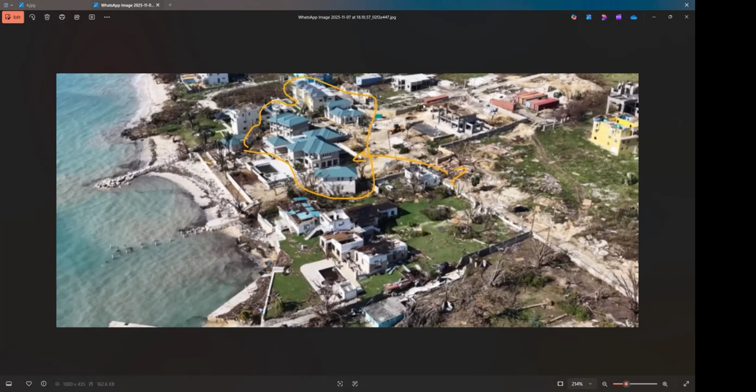But interestingly, there was this one, one of those drone pictures that they were taking down at White House. This is in Westmoreland. And if you notice here, this seems to be a new development, under construction. In a sea of no roofs, anything that is not a slab, gone. But yet still, all the roofs in this development are intact. It's the same roofing technology. It looked like standing seam roof, I think. But I don't know if they were just lucky or it's some kind of interesting construction there.

This is actually a screenshot from a video. I was watching the video, and I'm like, hold on, this place right by the seaside completely has all the roofs. So I thought that was very interesting. It would be nice to investigate how they did their roofing technology. Anyway, that's enough about the storm. It is already dominating our lives and the news airwaves. But I thought I would share my experience with the whole thing.

Anyway, so I guess most of you got my message, right? Switching gears back over to our module now. Who here has finished checkpoint 3? Give me a thumbs up if you have. All right, at least 90%? Give me a thumbs up if you have. All right, cool. Couple. 70%? Who here is at 70% completion? Give me a thumbs up. All right, cool. So the majority of persons here seem to be pretty much there.

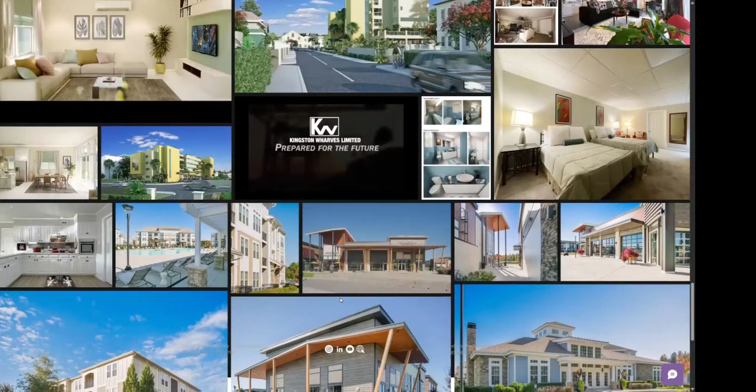Kingston Wharves has been connecting communities and markets for almost 70 years.

Here's what we're going to do. Let's not use the website because it's playing all those videos at once, which is kind of crazy. I probably need to look into that setting. I'm looking for the video directly because I have them somewhere in my computer. 1 second. Okay. Here we go. All right, found it. All right, here we go.

All right, so this was primarily for marketing that we did some years ago. We did some graphics. Right. So this was in Manor Park. Probably finished construction by now. So we did a little map graphics. We did that in After Effects, I believe.

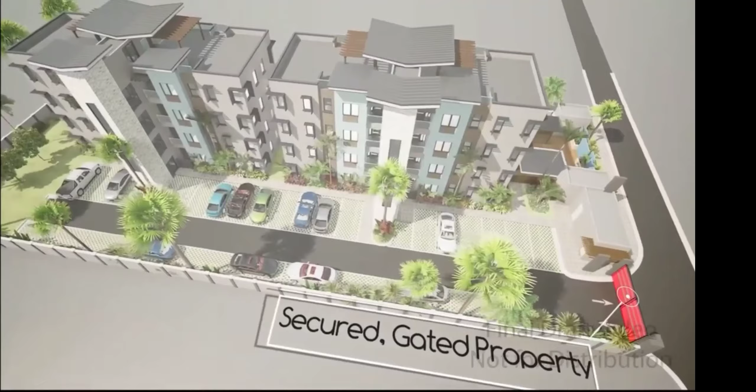And then we went up and did some drone images. We kind of transition in between the drone images and the rendering. So we did this in Unreal Engine, and we did the model in Revit. Most of those graphics that you see, well, this part is in Unreal, right? And how we did it, we did multiple versions and then overlay them together in Premiere Pro. Most of the text stuff is in Premiere Pro as well, all of the text information.

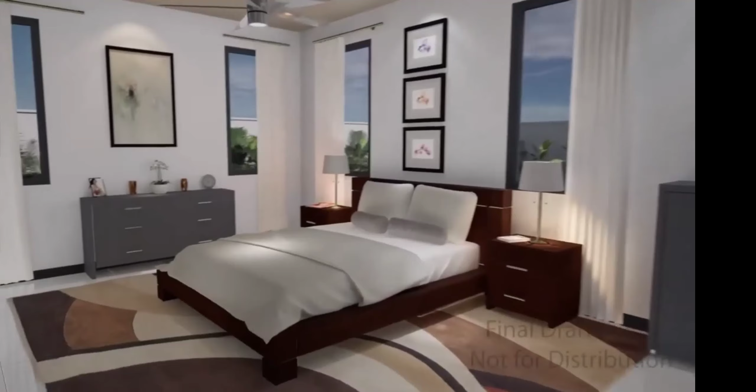There we go. So this was inside. These are not Revit furniture. We replaced them with custom furniture. It still has that draft video thing there. I remember we had fun putting flames under that kettle. That was kind of a journey to do that. All right. I think, oh, one more. All right, and then there was the bathroom as well. All right, cool. So that was pretty cool, and that was fun to work on.

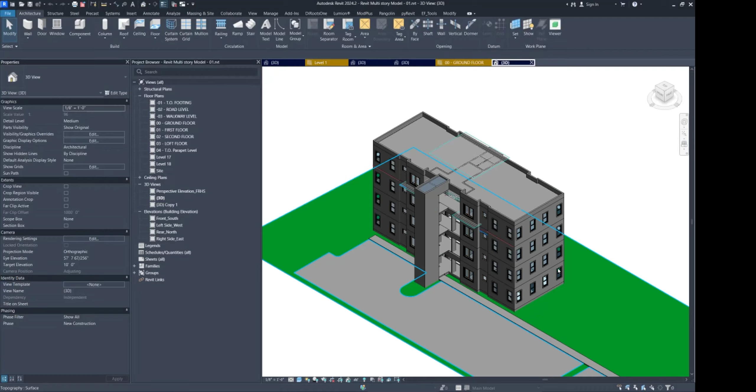I grabbed a version of that file that we worked on. This is the Revit model. I believe the original model was Revit. I don't remember. It was years ago. But the reason I wanted to show you that is I want to give you what the end product looks like, and then a little bit of some of the processes that we use. And this can definitely directly apply to you guys because you guys are doing a multifamily project. And there are some techniques that we employ here that you guys can use.

One of them is going to be groups, right? Anybody here ever used groups in Revit? Anybody familiar with groups? Give me a thumbs up if you are. Nope. Nobody? One person? Cool. All right. So once you have something that repeats, I would argue more than 2 times, then you should probably turn it into a group in Revit. So right away you can see that these apartments here, they repeat.

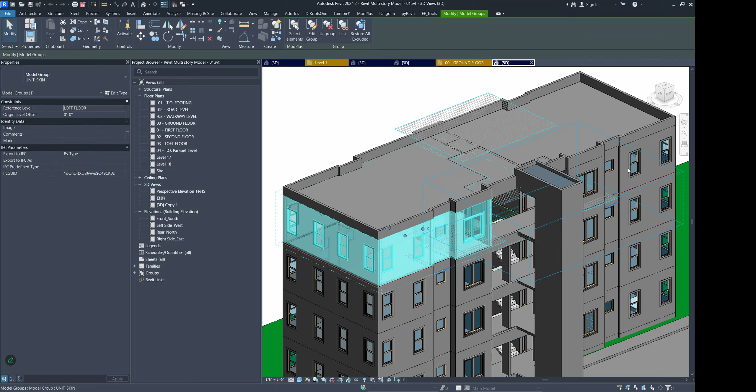We can also see that the stair tower does not repeat. It's just one thing, but the stairs inside repeat a couple times. So when I click on this, you can see that this unit here has repeated over here. And the great thing about this is that if I go into the group and I decide to remove this window here, choose OK. Then what you notice, all of the windows in the other groups are also removed as well.

Give me, oh, only 1 second. Sir, your mic is off.

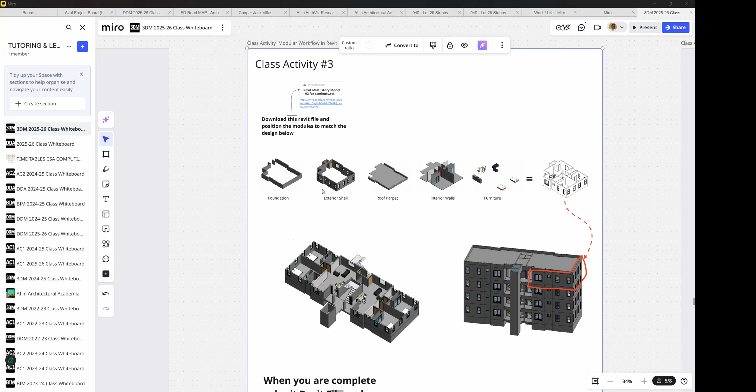It's mute. Sorry. Right. On the Miro board, there's a class activity that I want us to tackle today. And what it is, a version of this building, and it's broken down into different components. Now, the reason we're doing this is that this is a method that I would want you guys to be using when you're doing your multifamily project. It doesn't matter if it's a townhouse or apartment. Once you have something that repeats, you're going to want to put it in a group, right?

So I want you guys to head over to the Miro board. When you go over to the Miro board, just look under the section that says class activities, and head over there. And there's a link right here to the actual Revit file. It is a Revit 2024 file, so it should open in your Revit. And I want you guys to follow along. I want you to go access the file and open it up. When you open it up, it should look something like

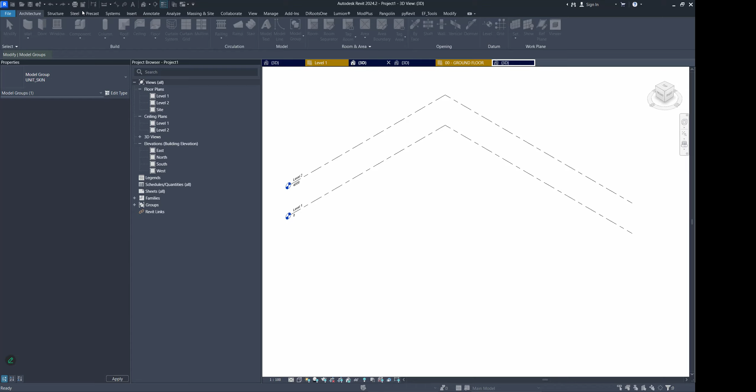there we go. All right, it should look something like this, where you will see the parapet, the furniture, the interior and exterior walls, and the foundation walls. All right, so I'll give you guys a couple of minutes, so just jump on the Miro board and use this. And what we're going to do, because you guys are actively working on your units now, so this applies directly to what you're doing in studio, right? Have you guys started to work on your overall building or just the units?

We haven't started anything yet. Say again, Mario? You haven't started anything yet? No, sir. We're working on programming right now. Ah, you're working on programming. All right. Do you have a question? Sir, it's not a question, but I was just telling you that I don't have Wi-Fi to open the files. Oh yeah, that's all right. So the students who don't have internet as yet can watch the recording and do that? Exactly. We have the flexibility, so you can hand it in when you get a chance. All right, just confirming. Thank you.

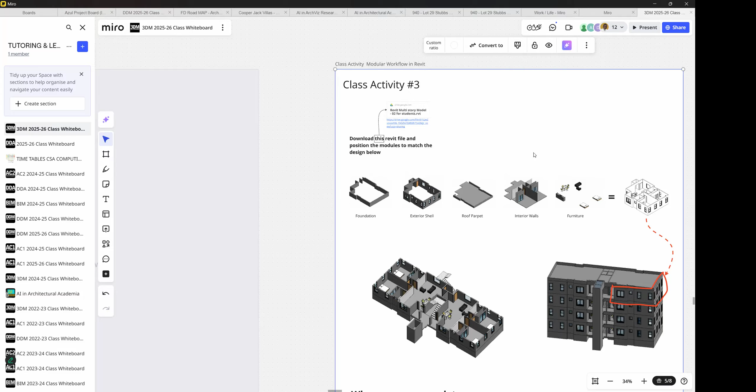As soon as you have your unit done, what I want to show you is a method of how you can set up your Revit file, because you have to put all the units together in order to generate your elevations, perhaps your sections. So I want to give you some tips on how you can do that. So let me just continue along our path. Go ahead and get this model file from Revit, and it should look something like this.

One thing I should definitely not be seeing is, if you have 10 units, you're repeating the same thing 10 times. No. You need to be using groups to supercharge your workflow, because working in Revit is supposed to make you go much quicker. For your design studio, you probably need to be showing a floor plan, your elevations, your sections, probably some sort of 3D view. All of those things we're going to be doing in computing so that you know how to do it for your design studio project.

So, okay. All right, guys. Have you opened the model? Anybody can confirm it? It's opening. Okay, cool. Give it some more time. All right.

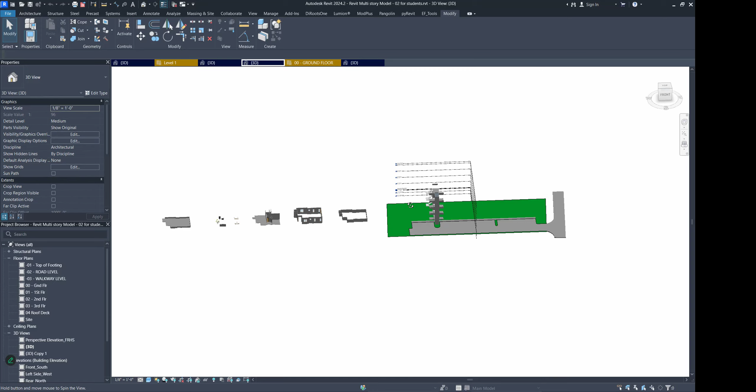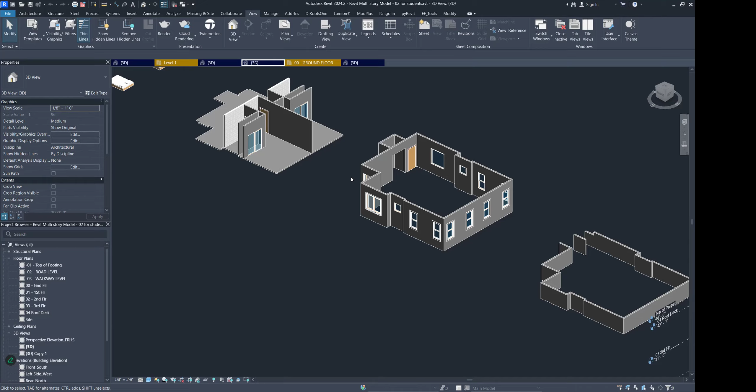By the way, if you are like me, I'm a fan of dark mode because I can be a night owl at times. If you're using Revit 2024, you can go to View and change your canvas theme to dark mode, and that will save your eyes. Somebody recently said they didn't know Revit does this, and I'm like, yeah, it's right there. As a matter of fact, CA is a shortcut. If I go CA, it changes back. CA again, it changes. Usually I work in dark mode while I'm figuring things out and modeling, and when I'm ready to lay out the sheets, I switch to white mode. But that was just a side note.

All right, so when you open up this file, you will see this is the parapet. So this is going to go on the roof.

And then you will see the furniture. Now, the unit we have is pretty straightforward. When you are designing your unit, so let me give you this version here. So this is a unit that is not fully designed yet, but this is what your model will probably look like for your design studio, right?

When you're working on it, you will probably be in a plan view like that, and you will probably be laying out your furniture according to your design and all that stuff, right? Now, as soon as you're done laying out your design, what I suggest is that you start a new file, a new project, and then this project is your production project. So in your production project, meaning this is what you're going to generate your floor plans, elevations, and whatever for.

So in this production project, you're gonna model your unit just like how you would normally do, putting in doors, windows, and everything. Then what you're going to do is separate out the major components of your building. So in this case, I have separated it into furniture, interior walls and floor, exterior walls. These are my foundation walls, and then this here is my parapet wall. So this is basically the roof, right?

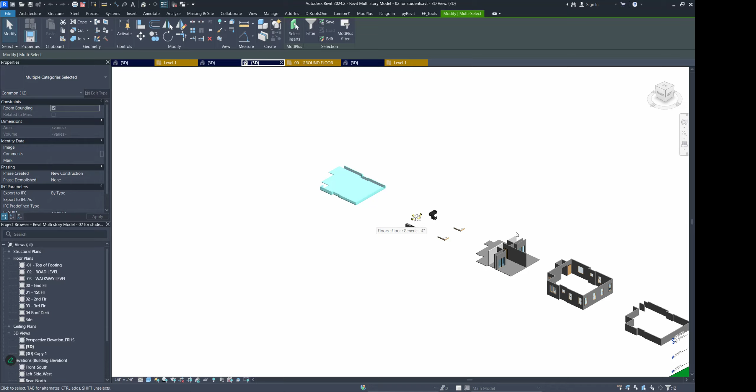Now, when you separate them out like this, you're able to group them. So the first thing I'll do, I will select this here, and I'm gonna go over to Modify, and then right here is where you will see Group, right? So I'm gonna click Group there, and you guys can follow along as well. When you click that, you're gonna get a dialog box that comes up, and I'm gonna call this roof. I'm gonna choose OK. I have a thing there, roof again. Let's call it roof 2.

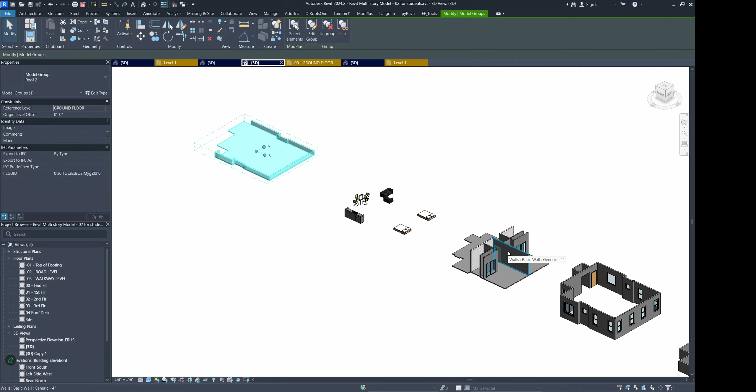Now, one thing to note is that I have separated this out to show you. If you had the model together, it would be kind of hard to select the different parts of the model. So this is why I chose to separate them out. So if you're kind of new to Revit, I would probably do the same thing. This is when you're finished with the unit design. I would separate them out, and then I will create groups and then put the groups together, right?

Because when the entire model is together, it's going to be much harder for you to click this, then click that, then click the top of this, then click the sink, click the stove, to click all these individual things and then group it, and then maybe you miss something. So when you separate them out, you can clearly see where you're putting your group. Remember, this is after you finish your unit design. You want to make sure that it's done, out of the way, and you're just trying to stack them together now, right?

Now, the good thing about groups is that you can edit your unit design even when you finish stacking them together. Because let's say that you realize, oh crap, I want to add a new closet or whatever. You can always change the one group, and then all of them will change, which is pretty cool. All right, so I grouped the roof.

I'm gonna group this. Oops, not that. I'm gonna choose Group. I'm gonna group this as furniture. I'm gonna put a close bracket there. The reason I'm doing this is because I have some other groups in this project. I don't want it to get confused. I'm gonna put this in a square bracket. Right, you can't use square brackets. Oh well. Can I use underscore? Yes, good. All right, good.

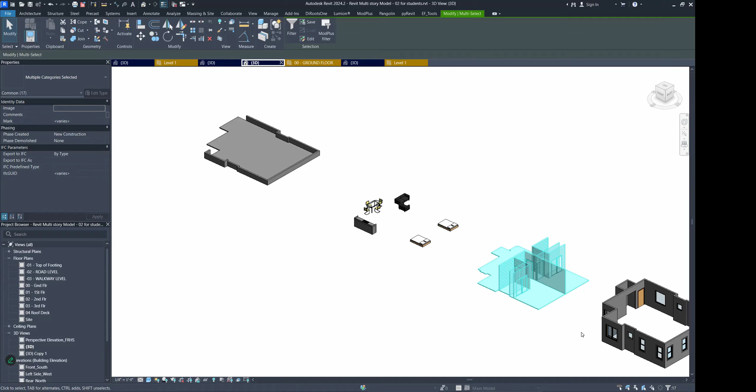So I'm going to select this one here now, and I'm going to group that underscore interior walls. And I'm going to select this guy here. Why do I keep pressing that button? I didn't mean to press that. I meant to press Group. And I'm going to go underscore exterior walls. Select this guy here.

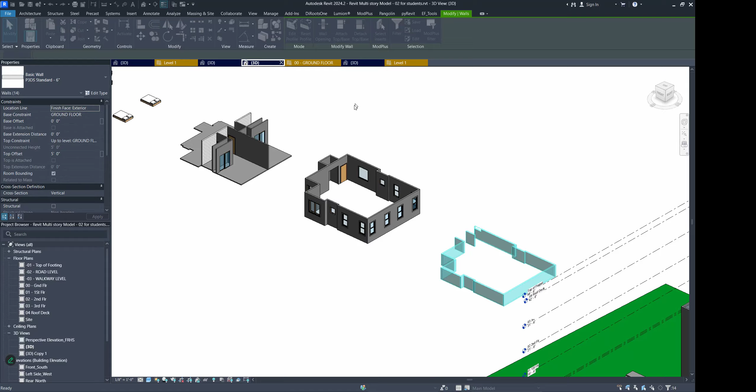And I'm going to group this one as underscore foundation walls. All right, now once I do that, let me just take my project browser and put it up here so that you guys can see it clearly. All right, I'll drop this over here. Okay, you don't want to go over there, that's fine.

Anyway, the reason I'm showing you this is if I scroll all the way down in my project browser, you see you have families and groups. If I expand this, expand model, you will see where I have those groups. Now I have some other groups in here, but these are the groups that I created: exterior walls, foundation, interior walls, and so forth, right?

Now if you're using this project, you're going to be seeing these other groups too. So I can't mass delete them. Can I delete that? No, I only can delete them one at a time. Anyway, just ignore them for now. These are the groups that I created up here. Now, here's the awesome thing with groups. Come on. All right. This is where you go to control the groups that you have created, right?

So for example, if I wanted to rename this group, I could just go to here and right click and rename. I can also rename it in edit type as well. So for example, I can go to edit type here, a dialog box, and I can rename it here as well. It will also rename. Good.

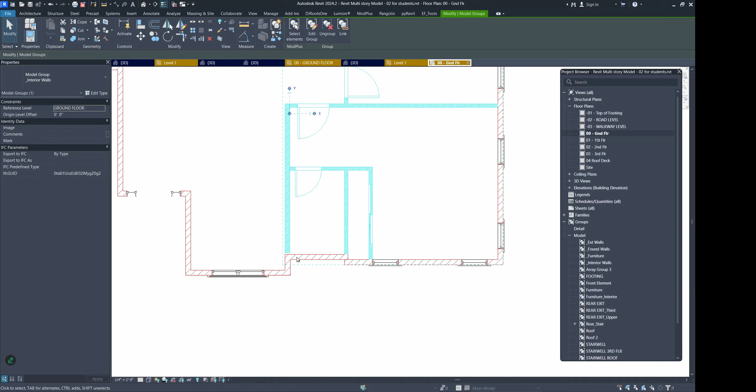Hold on, this should actually be down somewhere. So I'm going to use my align tool and align that like so. And these are correct. So that means that this guy here needs to extend a little bit more. So what I'm doing here is I'm double clicking the group.

Now you can know when you're not inside a group, everything is white. So if I click on this, you'll see that I've gone into my exterior walls group. And if I click on this, you can see that I've gone into my interior walls. Once I double click this, then everything else becomes gray, and then I can edit this group. So I want to use my align tool and send that there and choose OK.

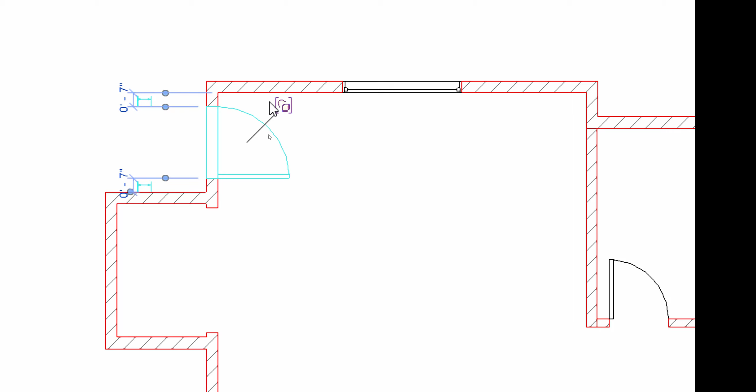All right. Now groups are very finicky in Revit. When I say finicky, I mean if you try to modify something and you're not inside a group, you have to be wary of that. So what do I mean by that? Let's say for example, this is a group here, and instead of going into the group, I use the tab tool and click on this door. Now when I use the tab tool and click on this door, you will see this little icon here. This icon means that it's in a group.

Now if I try to edit this door, sometimes I can edit it. So let's say I want to swap it out for a different size door like this. It will change even though I didn't go into the group. Now, of course, I could double click the group, and this means I'm in the group, and then I can edit this door just the same. Once I finish editing, I just choose the finish option like that, and then I'm done.

So you can select objects even without going in the group, but you have to be cautious about that, and I will show you why as we go further. The best practice is to really go in the group when you want to edit it.

All right, we're gonna add the furniture now. So I'm gonna just drag it over, and I'm just gonna align the kitchen counter. Align here to here. Do that again. Align here to there. There we go. And that is all the furniture. So notice that I put all the furniture in a group as well. And this is because, remember, you're going to duplicate this unit multiple times. So you don't want to be having to edit one group at a time.

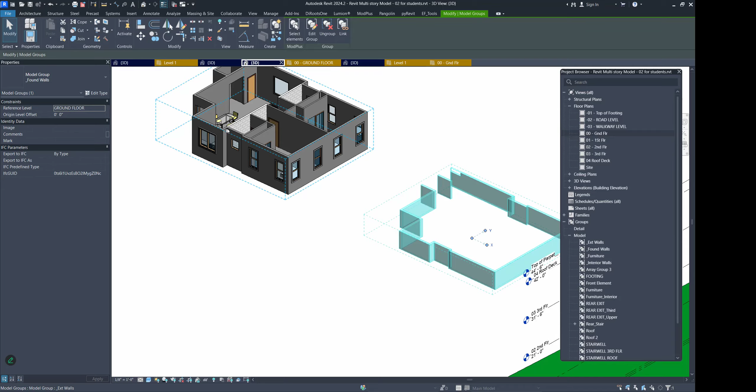And this group here only applies to the upper floor, so I don't need to be placing these two guys just yet. Maybe let me put my unit in the position first. Now, there are a couple of options you can do here. You can select all of this and then group this into another group. So this means you now have a group in a group.

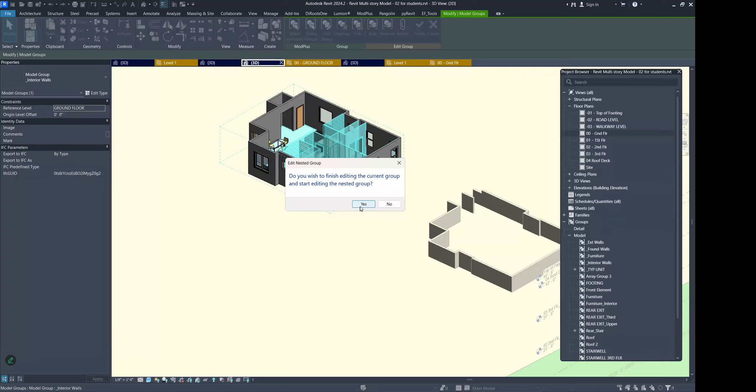So I can go to the group icon here, and I'm going to call this underscore typical unit. Now I've created a group of this. So I can double click in this, and I'm now in a group that has other groups, and I can double click in this, and it's going to ask me, do you wish to finish editing the current group and start editing the nested group? Yes. So you can see that this group is highlighted here, and now I'm outside of this group.

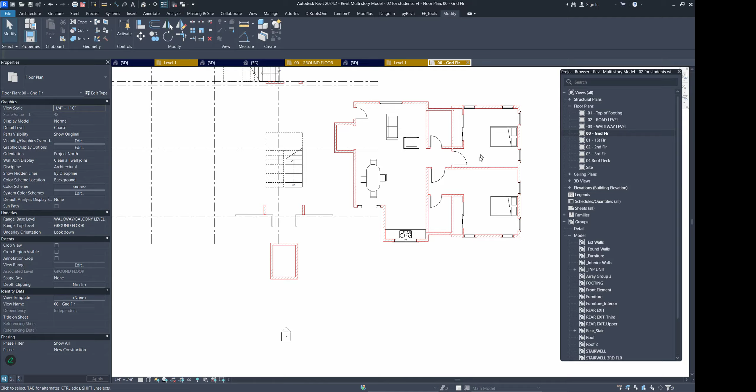Let's go to my ground floor here. So this is my group that I have here, and it needs to be over here. I'm not going to move it, I'm going to copy it. Oops. Press enter. CO for copy. I'm going to copy it over here. All right. Let's see. This is the entrance to the apartment. I need to try and remember how it's turned. Oh, I think this is flipped the other way. Right. Back here.

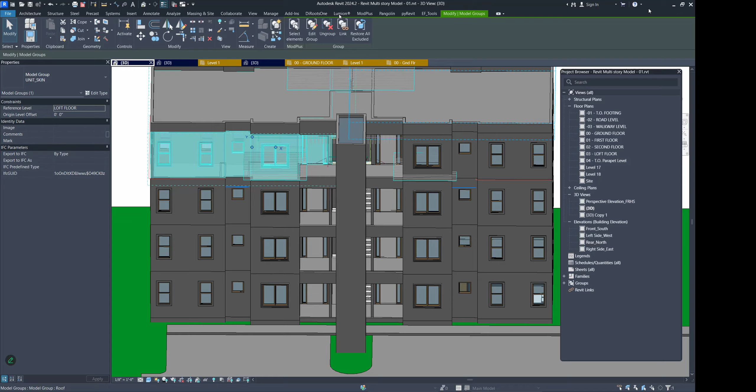I don't need this project. Close this project. Here. Good. All right. So this is already organized. So I'm just trying to remind myself. All right, so the entrance is towards here. Okay, good. Let's go back to my ground floor. Right. So yeah, actually it is like this here.

Let's see. Now, what you can do is use your grid lines. Make sure when you draw you have your grid lines. Remember, we used that in the major project to help with referencing where things should go. So let me use my align tool and align this like that, and then align this like that. I think that is how it should be. Yes, that is how it should be.

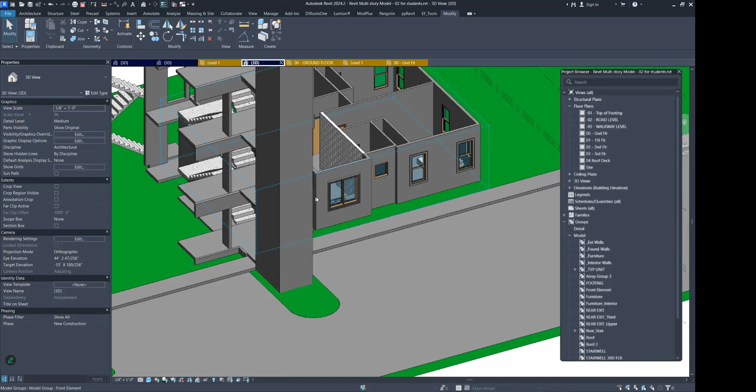There we go. So if I look in 3D view now, there is my first unit, and it's in position. Hold on. Actually, this should be over here, so I'm going to use my align tool and just align those two together like that. There we go. So you just flow into the ground floor. All right. Any questions so far, guys? Are you following so far?

Yes, sir. Can you go back to the plan? Right. So this is my plan view. So I go between plan and 3D. Notice the stairs fit in this little section here, right up to this point. But the plan might not show you everything you need to know, so you have to go between the plan and the 3D. Let me dock this down here so we can have more space. Remember you can always dock your 3D view over here, so that way you're seeing what's happening in 3D and you're seeing the 2D.

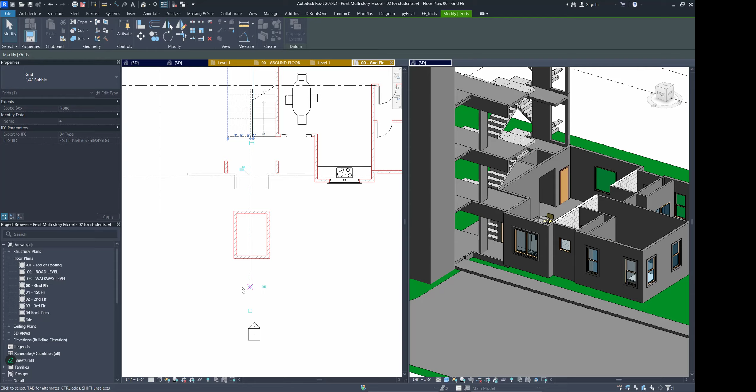Now, what I would suggest is that you definitely have a grid line that represents your center line. Even if it's not a part of your original grid, you need something to reference your center point, because you're going to be duplicating a lot of things based on that point. So in this case, I'm just going to move this grid line, put it here, and this will be my center point. I like to highlight my center point by making it stand out more. So I would do something like that. I don't even think that's the center point. Hold on.

Okay, let me use that detail line. So I'm going to go to... Sir, you had done something where I'm trying to align it with the stairs, but only the exterior walls are moving.

Right. Well, I had grouped the unit. Okay. So after I put the unit together, I grouped it, and I left a copy on the outside. So after I group everything together, that's how I move it here.

All right. So I'm gonna put this at the center line here. So I'm gonna grab this, and here's the center point there. So this is the center of my project, which goes through the center of this wall. So this is what you call a common wall, right? So what you're going to find out happen is we're going to mirror this now.

So if I click on this unit and I bring up, these are the two mirror. I'm going to use this one where I draw the mirror line, and I'm just going to draw a line on that center line. And there you go. By the way, if you mirror and it's not copied, then when you choose mirror, make sure that you choose this copy option right here.

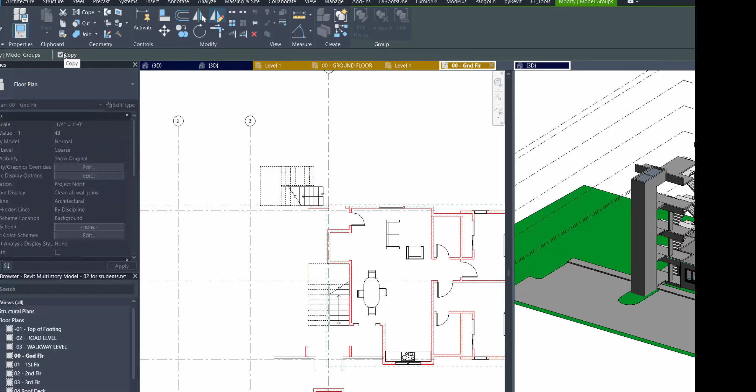Right. Anyway, all right. So when I do that, then it's mirrored on the other side. Now notice what happens. When you mirror, this wall here is going to be overlap. And this is going to be your choice. I mean, in some cases, it doesn't matter that much because you're not seeing this wall.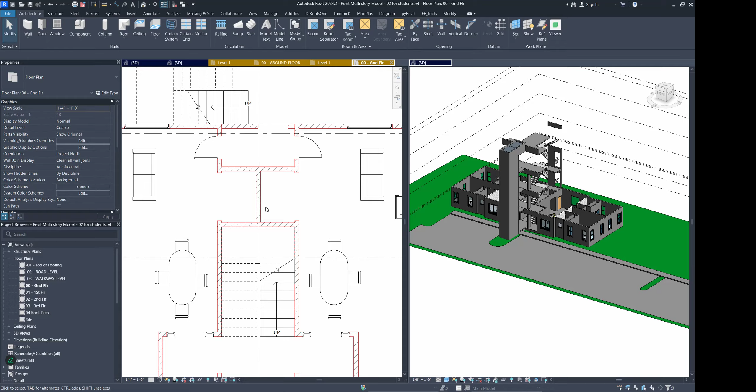But if you mirrored something in a way that you are seeing the mirrored wall, you're going to get what's called Z-fighting. I'll show you what that looks like. Where is it? It's here. So it will sometimes have a weird graphical representation. So like when you render this wall, like if you carried it in another program, Twinmotion, you can see that here, guys.

So this is what's called Z-fighting, because you have two polygons on the same axis, on the same planar surface. So this usually causes visual errors depending on whichever program you're using, right? Now, if you can see it, that's an issue.

In Revit though, you should always strive to have a neat model, meaning you should strive to never have this kind of thing here, because it's going to generate an error in Revit saying that, hey, you have two walls over each other, right? Now, there's a way that you can get rid of it. And let me see if I can give you an example here.

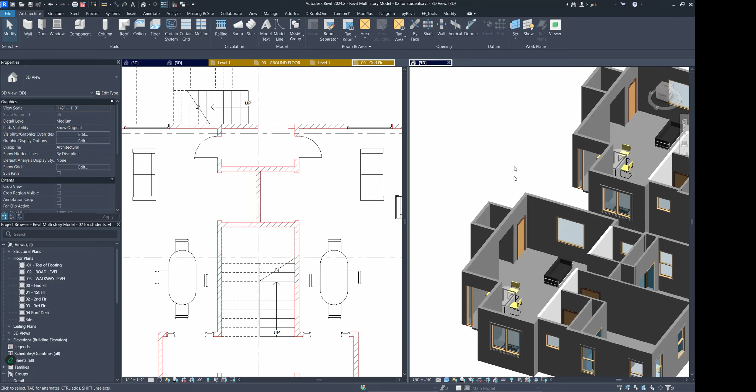So let's say this is my group here. Okay, I'm going to copy this again to show you this example. So let's say I have a group here. Now, if I go into this group, double click, and I click on this wall, or I go into the external wall group, yes, and I delete this wall, tell me what's going to happen.

Gavin, are you here, Gavin? Yes, sir. What's going to happen when I delete this wall? It should delete the wall from all of the other ones. That's correct. So if I choose OK, then look, everything is deleted. Even in here, it's deleted.

I mean, you could draw back a wall there that's not in the group. So that's one solution. But I would say the best practice for this case is to use an option called, what's it called again? Like hide for group or something like that. So to do that, when you double click here, so now I'm in the unit group. Or I don't even think I have to go in the unit group.

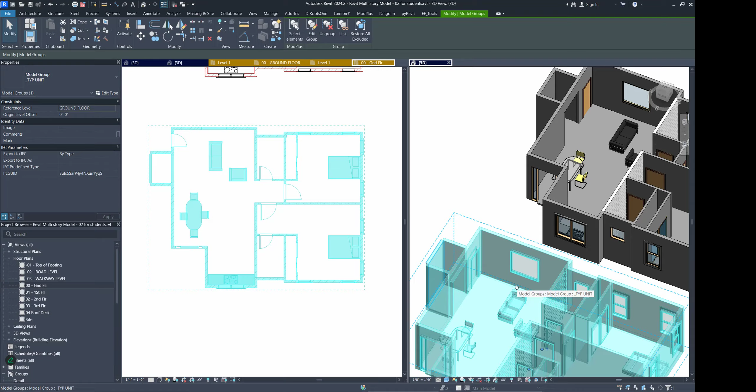Let's say I want the couch to go away, but just for this group. I don't want to delete the couch because let's say I want it in all the other groups, but just for this group, I don't want it here. I use the tab key and I tab till I can select the couch. And then you get this icon that's here. That's this icon here.

Or if officially it's in your modify tab, can you get the modify tab? No, well, not exactly here. So you can't get it to the modify tab here, but here, if you look, when you tab into it, then you get this remove from group icon. And when I click that, just click outside the group, it now is gone, but it's still there. Notice that when you hover over the group, you see the shadow of it.

So I can hover back. Can I get back the shadow? Yes. Can I get it back? Right. And then I can uncheck it. And now it's back.

All right. Now, another way you can do this is you can go into the actual group. So I can go into the furniture group, and I can click on the furniture. And should be... where is that little thing? It's on another screen. Okay. No, actually it's this. Oh, right. No, remove the element from the group.

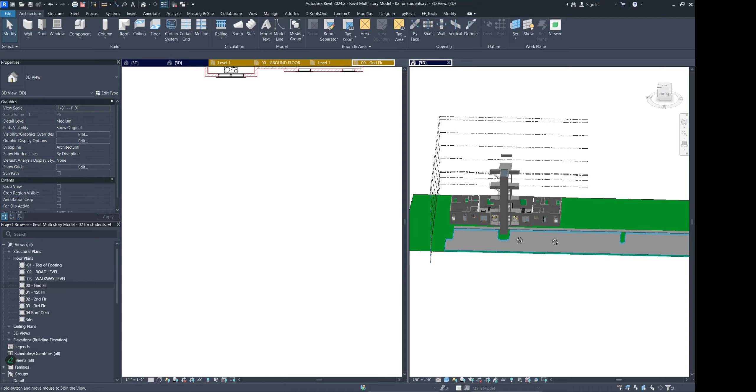And the good thing is that if you copy this again now, so let's say I copy this, it's still hidden. You get me? So that's great. All right, so now I have this done. Now what I want to do is I want to put on the foundation walls. Notice that when I'm modeling my unit, I don't include the walls that go down to the ground. So right now, if you look at my side view here, it's almost like this unit is floating, right? Because I don't include the walls that go down to the foundation.

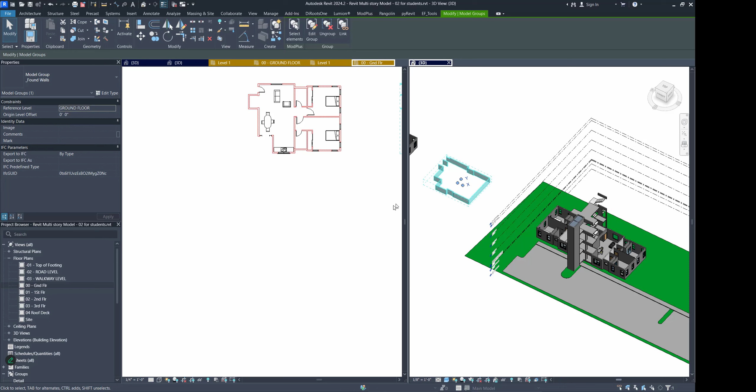And the reason for that is that my intention is to duplicate these units going up. So obviously, if I attach the foundation walls to this group, it's not going to work out, right? So I'm going to put my foundation walls on now. So what I do, I'm just going to use the align tool. I'm going to do it in 3D view. I think it's better in 3D. Make this a little smaller.

So I'm going to do AL to align, and I'm going to hover here and just choose this align like that. And wait, it does madness. Why? Because it's on the same level, right? So what I want to do now, this is where things get tricky with groups, when you're moving it between levels, right?

Now, there are two ways you can do this. There is the quick and dirty way that can cause problems, and then there's the proper way that usually doesn't cause problems. The quick and dirty way is that you can just click on this group, and actually maybe not quick and dirty, but maybe quick, but can be dirty. I can click on the group and then I can put it on a different level, like top of footing, and then the whole group goes down.

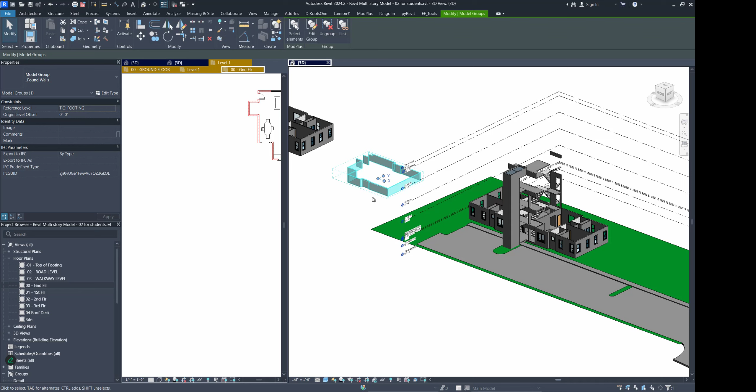Actually, I think that's the best way to do it. So yeah, scratch that. It's not necessarily quick and dirty. Perhaps I would do it this way, because you can just change the level of the group here. Now here is why this works out for me. This works out for me because I have a level called footing. Here I have it here, top of footing.

TO means top of. Now, if in your drawing you did not have a level for the foundation to go on, then there would be no way to move those foundation walls down, right? So when you're doing your project, you need to ensure that you have a level that can accept a group, right? If you don't have a level, then that can cause problems, because you want to attach your group to a level rather than try and say, okay, just make this group be 5 foot below the ground.

That's a bad idea. It's better you create a level below the ground and then say, attach this group to this level. All right? You following, Marvel? You understand that concept? Ish. Right. Now, let's imagine that I didn't have a level here.

How would I do a new level? All right. Well, what I would have to do is I would have to go to my, put this back in the middle. I would have to go to a section view. So in this project, let's say I don't have a section, right? I don't have a section. I don't have an elevation. All I have is plans.

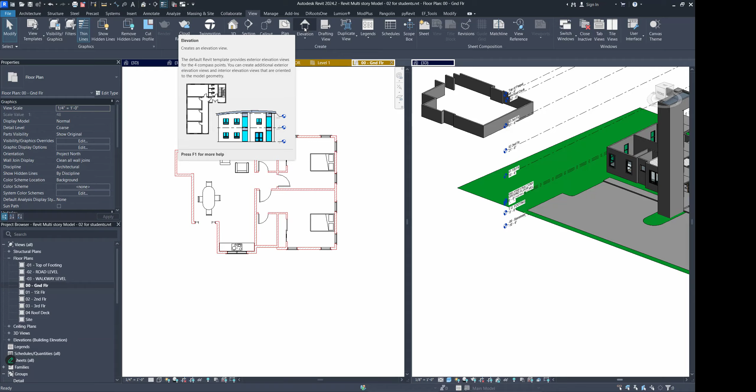Then what I would need to do, I would need to go to architecture. No, I would need to go to view. And then I would click on section, or I could click on elevation. Doesn't matter. I need a way to see the drawing flat, right? Usually I would go with section, and I would just draw a section from here to here. Now, once you draw a section, it will create a section view.

That's what you can see here. It automatically creates this section 1 that I see here. So I'm going to open that. And now you will see I have the section there. Now, okay. Now the reason why it looks like that is because I drew the section over the unit, not where I have the building.

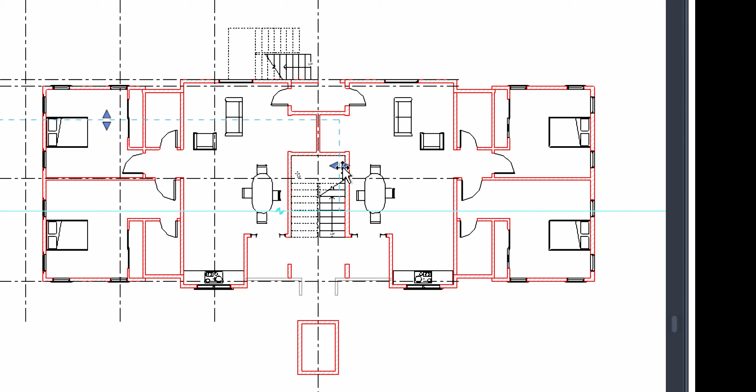So let me put it over here. Let me extend the section. Notice where you see these arrows here. This is the extent of how far I will see in the section and how far back I will see. Like that. So I'm adjusting that now. So I want to see everything inside of here. All right. So now if I go back to my section view, this is what it shows me.

So what I would do now is that if I didn't have a level below the ground, I would just now go to architecture and say create new level. And I would just draw a level. I need to draw it here. All right. I would just draw a new level. So that is how I get a new level. Now, you guys already know how to draw levels because we did that in our major project.

But the reason I'm showing this is to reiterate the fact that if you need your group to go to a different level, make sure you create that level first, and then you move your group to the level. So what I've done here, I've moved this group to the level called top of footing. And if I just drag this over here, you can see that top of footing is the level that

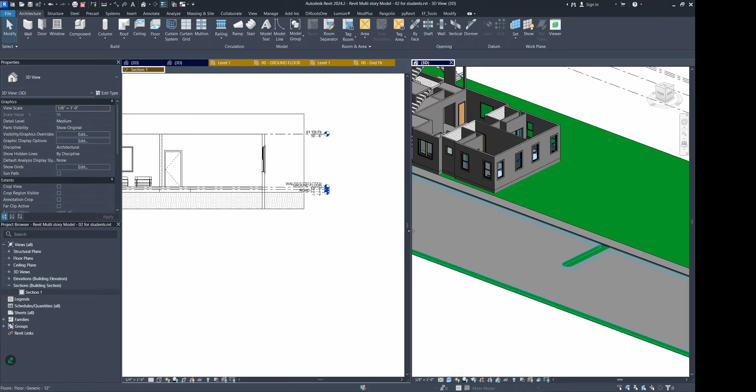this should be on. So all I need to do now is to align here and align this wall. There you go. All right. So notice now I have my walls going on the ground.

Now a good measuring stick that you can use whenever you're putting your building together is I love to use section box. So to do that, make sure that you have nothing selected, and in your properties section you can click section box here. And what this does, it does what it says. It cuts a section in the box. So I can drag this over here and see what my building looks like when it's cut. And you can see there are my foundation walls going down.

And I mean, we're not going to get into the technicalities of foundation, but from a visual standpoint, I just need to not be looking under my building. In reality, when you're building a building, the walls go below the ground, into the ground. So that's what I want to represent here.

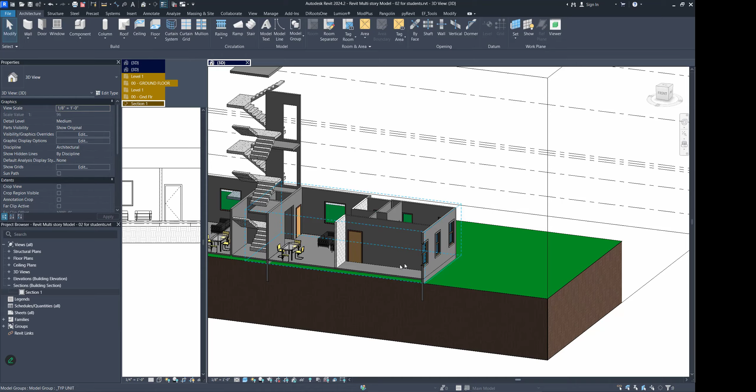All right, so if I don't want the section box, then all I need to do now is go back over here and just say that I don't want the section box anymore. And that's it. It goes back to showing me everything. All right, so now obviously I want to get my foundation walls over here. So notice that I'm doing this in 3D, right?

So actually, wait, should I do it in 3D? Yes, because guess what? I don't have a floor plan for my foundation. So there is no view for me to click on to see just the foundation walls. Actually, there is. Yeah, I have a top of footing level. Yeah, the top of footing level does show it. But in case, let's do this a different way, right?

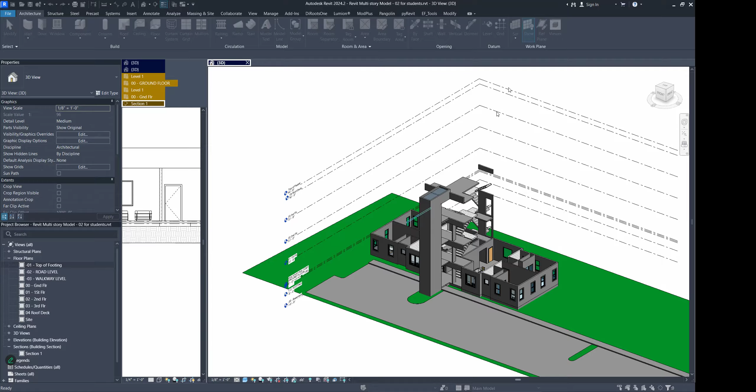If I needed to mirror this over here in my 3D view, what I can do is I need to check to see where my work plane is. So if I go to show, I don't know where it is. So what I need to do is go set my work plane, and I want to set my work plane to be my ground floor.

So now you can see this big blue line here. This represents my ground plane. So now when I click on the foundation wall and I click modify and mirror, I have to draw the mirror line, and the mirror line is going to be drawn on the work plane. So I'm just going to choose an arbitrary spot and just draw a mirror line.

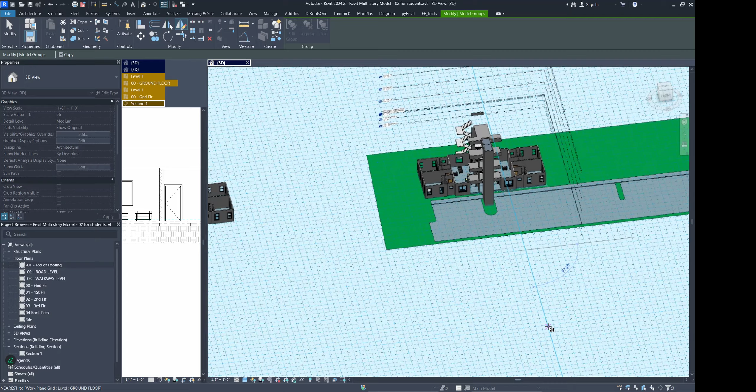Come on, mirror. Just draw a mirror line. There we go. So I'm just drawing a mirror line this way. Cool. Let me do that again. Mirror. I'm going to draw it over here. There we go. Now, even though I drew it all the way over here, it's fine. I can just snap it back into place using the align tool. I can just go align, AL.

Sir, couldn't you just mirror it from the section? Yeah, I could mirror it from the section as well, but I'm just demonstrating how you would mirror it in 3D, right? You can mirror it from the plan, you can mirror it from the section, or you can mirror it from 3D. If you're mirroring stuff in 3D, you have to set up your work plane first. That's why I'm showing you this way, because there are some things where you're not going to have a section view or a plan view that shows it. You're going to have to do it in a 3D view. And before you just click mirror in a 3D view, you have to set up your work plane so that you know how it will be mirrored. You know what I mean?

So my job here is to show you all the ways, and then you pick the best way, right? So I'm going to align the back wall now, like that. So there you go. This is now aligned. All right, so now all I have to do is copy these floors up. And to do that, I would probably use my section view. So let me bring this back out, like that. So it's my 3D view there. If this blue is annoying, you can always just turn off work plane so you don't see it.

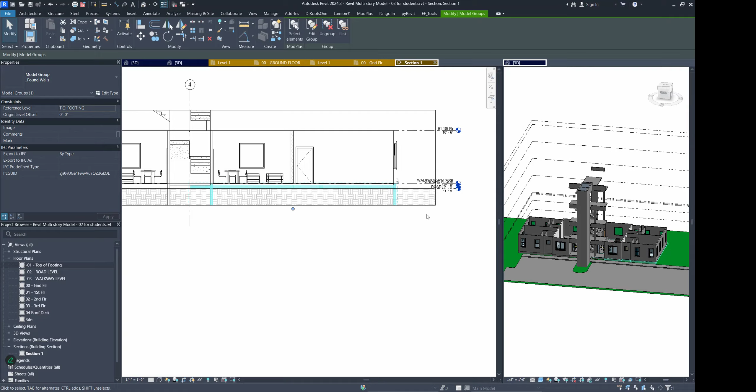So when you want to put a group on a new level, when you want to copy it to a new level, it's a little different. In the case of my foundation walls, I didn't want to copy it to a level. I moved it to the level. Obviously, if I click on my floors here and I move it to first floor, then it's going to move up. But in this, I don't want it to move up. I want it to copy up. But you can't use the CO copy command. So what you have to do is, you can even do this in 3D view. You don't have to do it in section. Doesn't matter which view you do it from.

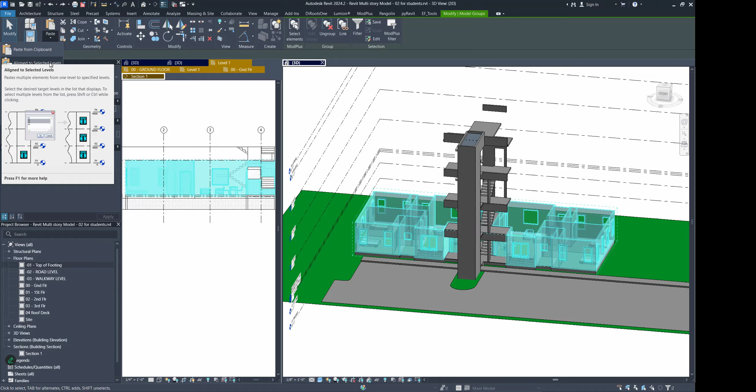So I'm going to select my units here, and then I'm going to go to copy to clipboard, which is different from CO copy. So under modify, I'm going to go to copy to clipboard. And then here's the trick, guys. You're going to go to the down arrow, and you're going to go to paste, align to selected level. So I'm going to pick that, and it's going to bring up a dialog box for me to select what level I want to paste this on. So I'm going to say I want to paste this on the first floor. Voila. And I guess you can guess what happens next, right, guys? Do the same thing. Paste, align to selected level.

Anyway, let me show you a different way that you can paste. Remember, I'm going to show you all the ways and then you pick which one is better. Another way you could do this, and I'm going to show you in both views here. I could select my floors here and I could choose copy. Then I could go to my second floor in plan. So this is my second floor. What I'm seeing in the background here is the level below. And then I can now go to modify and go paste, align to current view. And yep, it pasted it aligned to the current view that I'm in. So that's another way that you can paste.

Let me do it again. So I'm going to do it one more time. I'm going to do copy. But this way, I would say, is not recommended.

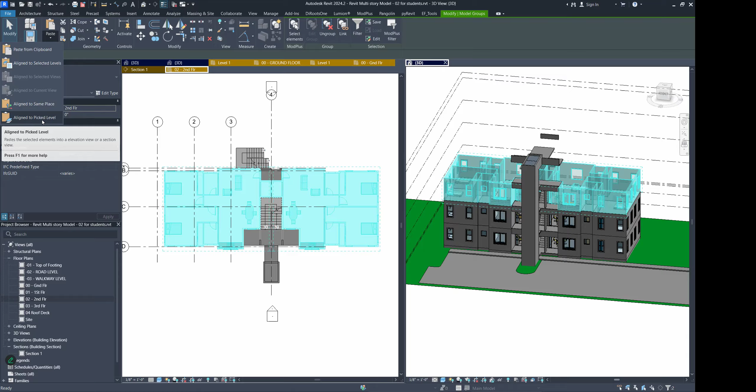Because things can get a little funky in groups. I would say my favorite way of doing it is the more mathematical way, where I can go to copy and I can go to paste, align to selected levels. There's another way you can do it as well. You can go to paste, align to picked level, and if I choose that, then all I have to do is pick which level I want it to align to.

So in 3D view, I can actually pick the level. So I'm going to pick that level. And voila, it copies as well. So those are a couple of ways that you can do this. Now, I'm not sure how many stories your building is going to be, but usually your top floor always has a higher level. Sometimes you have a penthouse level up there because you're not sandwiched between units.

Now that can be a little tricky because if I choose to raise the height of the wall, it's going to raise the height of all of these walls. So there are a couple ways you can tackle that. There's an advanced way and a basic way. I'm going to tell you guys the basic way. The basic way is to do what I did here. Just draw the upper part of your roof and your slab as a different element altogether, a different group. And then you just put it on top like a crown, right?

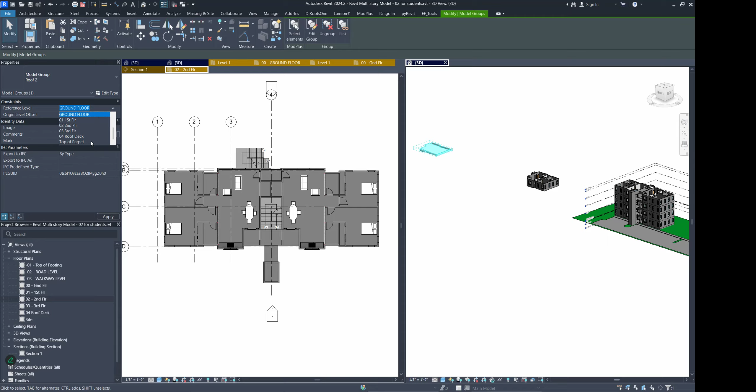So I'm going to do the same thing here. I'm going to move this to roof deck. And then I'm going to align it. I'm going to align this wall to here. There you go. Now you might notice that in Revit, you see this is what is called Z fighting. You can kind of see it's happening here because the walls below are on the same level as the slab.

Now you can raise the slab up if you want. That's one way you can solve it. I would argue that the proper way to solve it is by attaching your wall to the slab above. So for example, if I go into this group, actually you can't really see it here. How about I do a section view.

Oh, by the way, guys, let me show you this awesome trick, right? So check this out. Let's say that I only want to see this unit here. All right, let me give you a better example. Let me go to my third floor in plan. Let's say that I click on this group and I only want to see this group. I don't want to see anything else in 3D. Then look for this little icon right here, so go to modify, and there's this little icon here that basically isolates an object in 3D, and I click that.

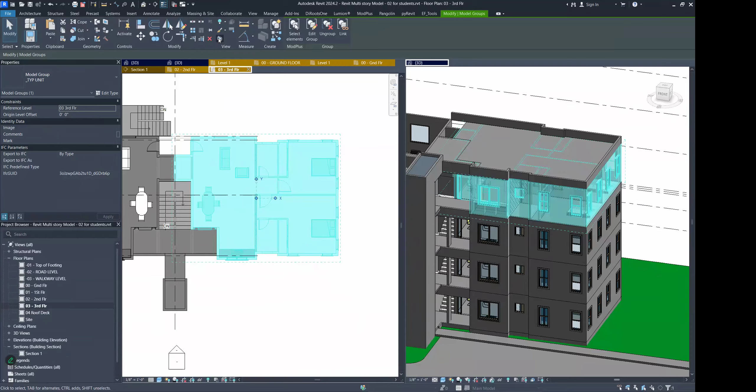Then what happens is that Revit automatically creates a section box for you and isolates the element that you picked. It's pretty cool because I can just click on this bed and I can do the same thing. Bam. And it literally cuts everything away except the area with the bed. And I can go in the 3D view and I can expand that view and only show this, which is pretty cool.

So sometimes you have an object and you're trying to figure out what's happening in this corner here. You can't really see it from the plan, and all of that. You can always use this feature. So you just click this option here. So that is pretty cool.

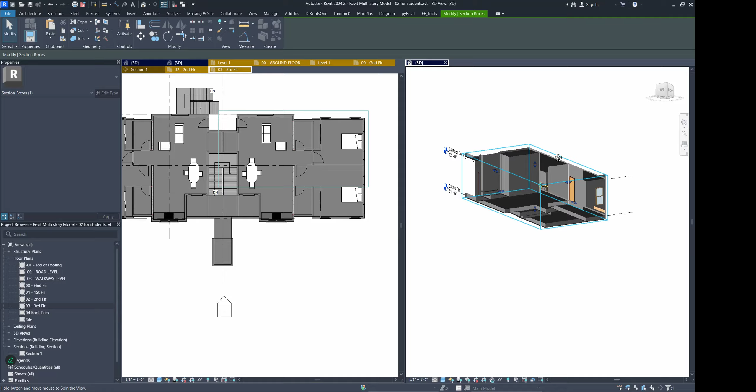All right, so I wanted to show you this thing where, right, so this is my unit here. Let me make this a little bigger. You can see where my walls are touching the slab. Actually, it's a little higher than the slab, because in my case, I think I made the slab a little higher. That's not what's going to happen to you.

What's going to happen to you is that when you're doing your studio project, chances are you're going to get something like this, where all your walls are going to the surface of the slab, right? And if you're like me and you build efficiently, you have all of these duplicated. So obviously, if you make this wall taller, it's going to make all these walls taller, which is bad. So what you can do in this case is, I'm going to show you. For example, let's say this wall right here. I'm going to double click and go into this group.

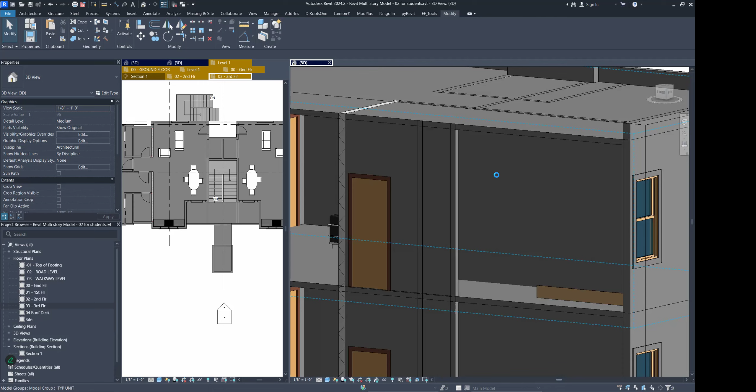As a matter of fact, you don't even have to go into the group. You can just tab into it. And what I can say is attach to top and just click that. Bam. I can do the same thing here. So let me show you with this wall. Oops. So you don't need to go in the group. I can just tab into this wall here and I can say attach to top and then click that. Then notice it automatically gets clipped to the top.

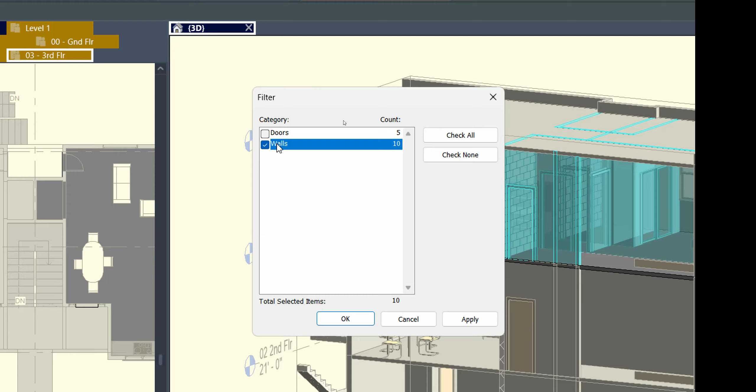Now this might be a little annoying to do because obviously it's hard for me to see the walls in order to do it. So the way that I recommend to do this is I would go into this group, into the internal walls group. And what I would do is I would select everything in this group. Just draw a box around it. And then I would use my filter. And then what I would do in my filter is I would say, all right, I don't want you to select any doors. I only want to select my walls, and I'm going to choose OK.

So now I have just the walls selected, and then I just choose attach to the slab, and I choose OK. And voila. And guess what, guys? This only happens for this group. This group is the same. It's not attached to above, but only this group it gets attached to here. So of course what that means is that this group over here, it's not doing the same thing.

So let me mirror this. So I'm going to mirror this guy here. Mirror. And I'm going to align. Actually, let me drag this over some more. As you know, if I drag this, notice that once I go beyond where the section box is, it's just going to clip it. Anyway, so I'm actually doing this in 3D, which some of you might prefer to do this in plan. Totally up to you. There you go.

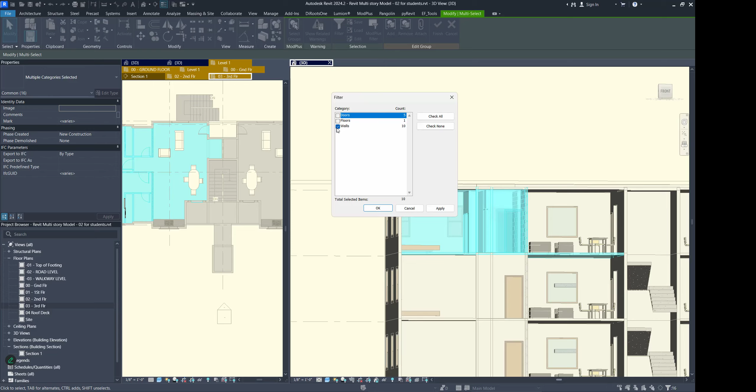Now, same thing again. Notice that these walls, they are showing on the roof slab here. So I'm going to do the same thing. I'm going to just go into the group, go into the internal walls group, select all the walls, select everything, then filter and say, I only want to select the walls and choose OK, and then attach.

All right, guys, what do you think? Are you following the idea? No, sir. All right, which idea you're not following? The attach walls idea? Yes, sir. All right, a quick way to show you that is, let's go over here to my solar unit here. As a matter of fact, I'm just going to go over here and I'm just going to draw a bunch of walls like that.

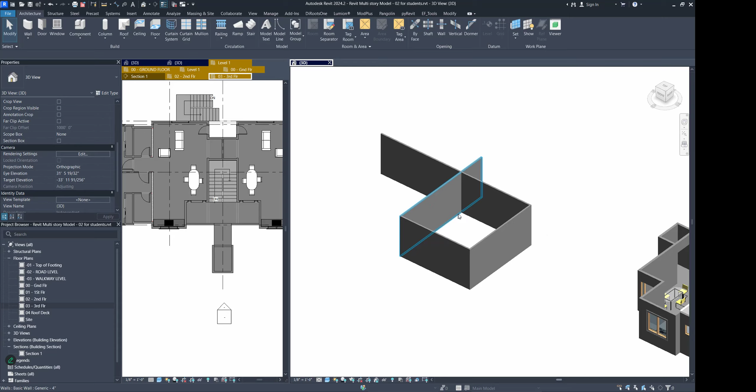So how this works is I could draw a slab. So I'm going to draw a floor slab now. Let's say I draw a floor slab like this. Choose OK. So that's my floor slab. Now my floor slab is on the ground, but what if my floor slab was on my second floor? So my floor slab is all the way up here. Now, if I wanted these walls to touch this slab, yes, I can just drag it until it touches the slab. I could do it that way. All right, you follow? You understand that way? I could just drag it.

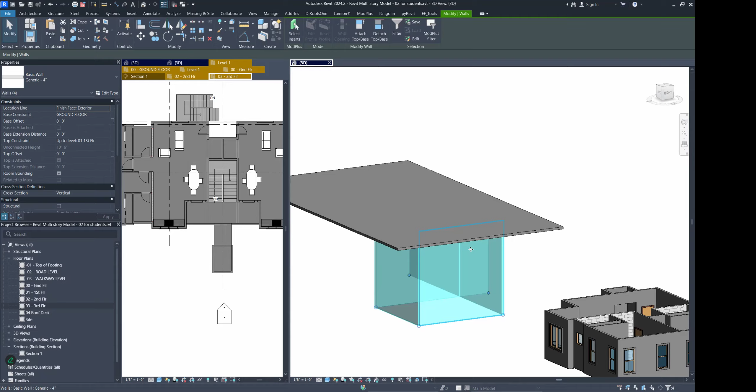Yes, sir. Or I could select these walls and say, all right, I want the top constraint of these walls to reach to the second floor. And that could also happen, right? Same difference. Another way I could do this is I could say, okay, I want these walls to attach to the base of whatever I click on. So I click this and I click that and it attached. But the magic with this way is that it attaches to the bottom.

And if I move this, so let's say I decide that I want this slab to no longer be on the second floor, I want it to be on the third floor. Notice what happens? Tell me what happens. The wall adjusts to match the height. Exactly. So when you use the attach to top or base, that is what happens. Now, if I move this wall this way, choose OK. Why, you notice how, oh crap. Why you think it's giving me this error?

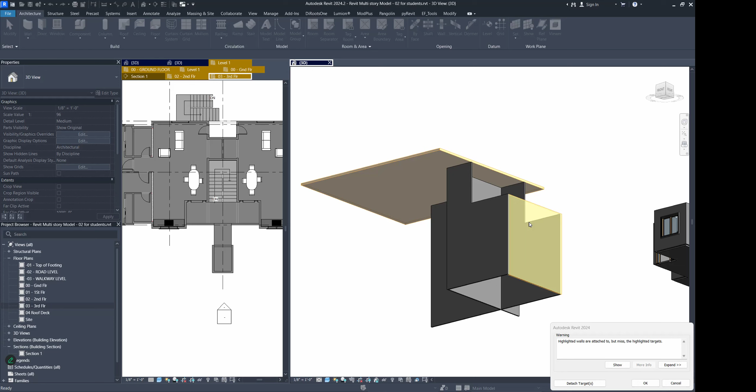Because the slab doesn't cover, I guess, all of the wall. Exactly. And it's telling me that this wall is not going to be attached to anything anymore because it's not there. So if I say yes, right. So that is how the attach feature works.

So what I was saying is that on the top floor, because you had the Z fighting, which is this, anytime you have walls that are going through your slab, use the attach feature and then it will just make it attached to the underside of the slab, right?

But the attach tool even goes even further, because if I decided that I wanted a roof, for example, let's say I wanted a roof and I'm going to just draw a roof like that. Just draw a roof like that, and I'm going to make it a, is this a roof? All right, yeah. I'm going to make this slope 20 degrees.

I don't think we did roofs. No, you would have done it in second year, right? Yes, sir, yes, sir. Right. So I have a question for you, continue.

Okay, go ahead. So how do you get the two windows to show at one time? So you have the 3D and the plan view showing simultaneously. All right. Hold on, need to do this again. If you're using Revit 2022 and up, or 2023, I think, you just drag it out.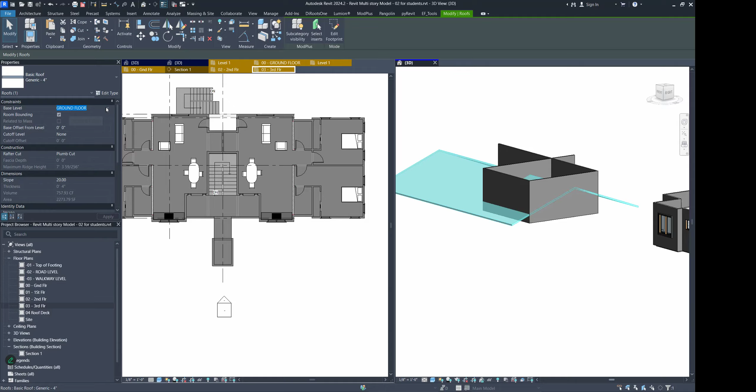I will put the roof on my first floor. I could use the attach feature as well. I could just say attach to the roof. And voila, it's attached to the roof. I could just select all of these walls and say attach to the roof. And if you decide that you no longer want it to be attached to the roof, then you would click the wall and choose detach and choose it again, and then it's gone.

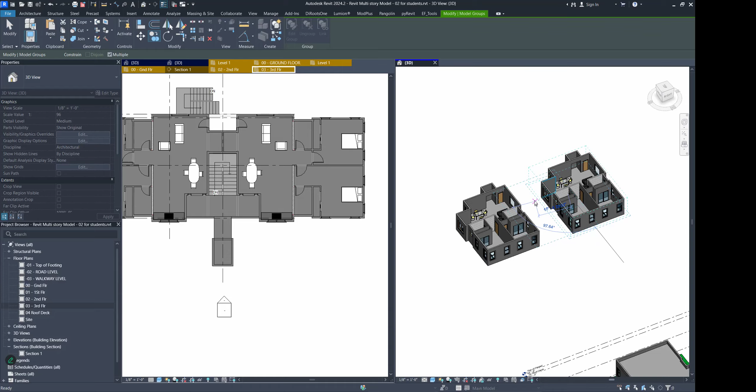All right, so that's just a quick tip. Using the attach tool is pretty cool, and you can use it in groups as well. All right. One thing to look out for in groups is, I wouldn't call it a flaw, but there's something that you have to try and avoid at all costs. How can I replicate this? Okay, let's say that I had these two models here, right? And these two are grouped.

But let's say that I wanted to put a window into this wall here. Let me spin this around and make this a little bigger. Suppose I wanted to put a window in this wall. Well, I would have to go into the group, go into external wall, and then I would grab a window and I would just plop it there. And then when I plop it there, Abigail, what will happen when I choose OK?

Abigail? Is Abigail here? She's coming? No? Tariq. Is Tariq here? Tariq not here? What about Joel? Are you here, Joel?

Yes, sir. Right. So what would happen when I click OK with this window here in this group? Not sure. Let me throw the question out to anybody. Who can answer me? So you get it added to all the other copies. All the other groups, right. So if I choose OK here, then I would get a window here.

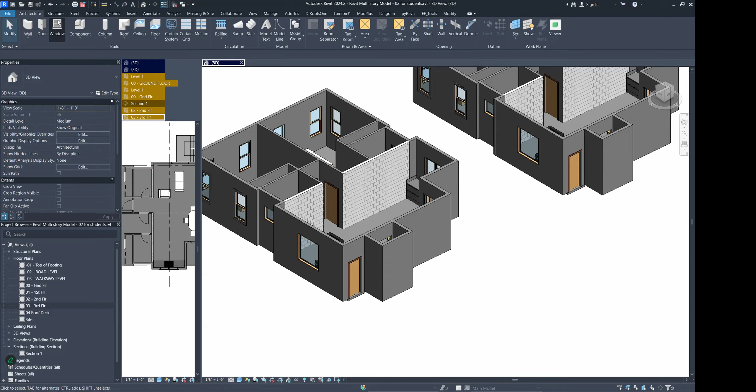But what if I'm feeling, I guess, lazy and I don't want to go into the group to put a window? If I just go to the window tool and I just drop a window in this group, bam, then it would seem to work, but this is not good. The reason that it's not good is because you have put a window in a wall that belongs to a group.

So that will come back and bite you in the butt later when you try to do other things with the group, and it's going to be saying, hey, something's not right with this group here. So let me see. If I copy this, it will work. So it's like you have multiple groups, but then you have some group with a window, and sometimes you won't even remember. You will be like, okay, how come this window is not in this group? And the reason for that is because you added it to a wall that belongs to a group. So that is one thing that you need to avoid doing.

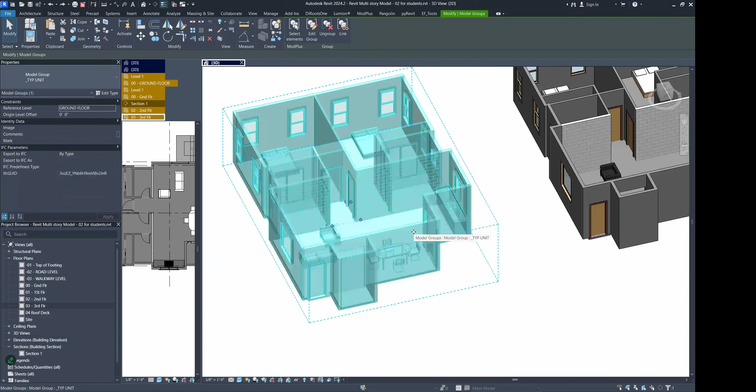Also, I'm trying to think of some do's and don'ts with groups. Okay. If I put an opening, let me see if this one gives me that. All right, so check this out. Let's say I have a wall here like that, and I use the opening tool, which is this tool here, and I draw an opening in this wall. Oops, draw opening. Come on. Right, I draw an opening in this wall. So that is using the wall opening tool.

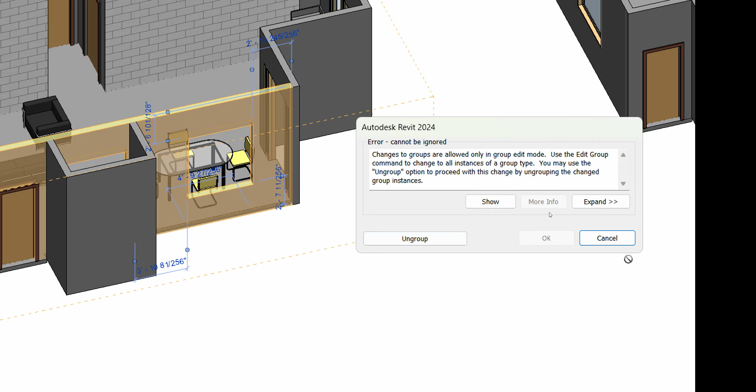When you're working with groups, go into the group before you make any changes. So if you wanted to add a new piece of furniture, let's say you wanted to add a television or something, don't just add it here. Go into the furniture group and add it. All right, guys?

All right, I think that is all I want to say about groups. The rabbit hole goes much deeper, but I don't know how far I should go, because you know enough to be dangerous in order to produce your project, right? I would say that if any of you are having trouble with groups whenever you draw your unit, when you come to class, remember, we're dedicating the lecture classes to help solve issues with your final project. And a lot of issues can happen as a result of groups. So any other discussion about groups, just talk to me when we go into the lecture sessions, right? All right, guys?

Okay, sir. So I have a question. Yeah, go ahead. Oh, no, man. Well, I was going to ask if when you attach the wall in one group, it's going to attach to the other, but I realize it doesn't. So right, it's unique to that group, which is a good thing. Yeah. All right.

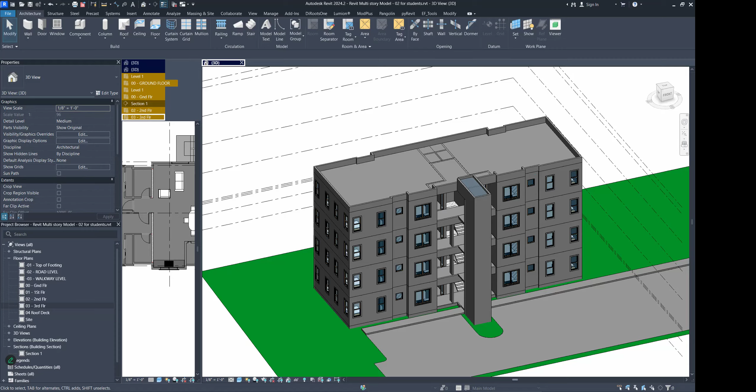Because, by the way, guys, there's a bunch of resources that I have placed in, where is it? Where did I put it? Tips? Right. I should put them under tips. Yeah, I'm gonna move them under tips. Let me do that. Over here. I'm telling you, this is like a treasure trove of information, guys, that you can really use when you are designing your interior. It's particularly about kitchens, because that's where we're going to be focused in our module. Let me clear this up. Where did you go? Close that.

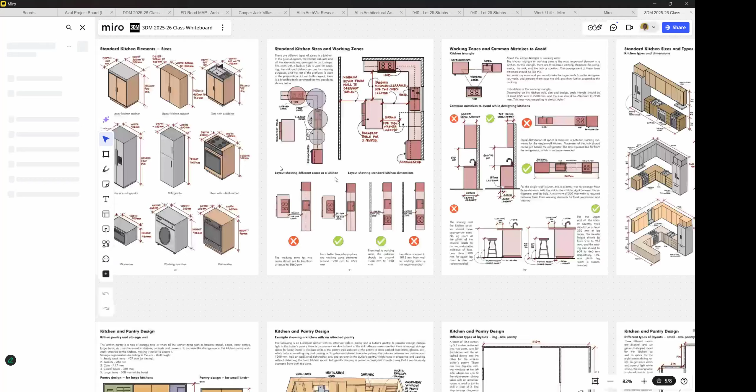There we go. This is a treasure trove of best practices, things that you should do and shouldn't do whenever doing a kitchen. And I'm going to be working alongside you to show you how to use Revit to create your kitchen. Now, you are going to submit to me the kitchen that you do in Design Studio in computing class as a rendering, right? But in order for me to do this lesson with you, I need you to be actually working on your unit. You know what I mean?

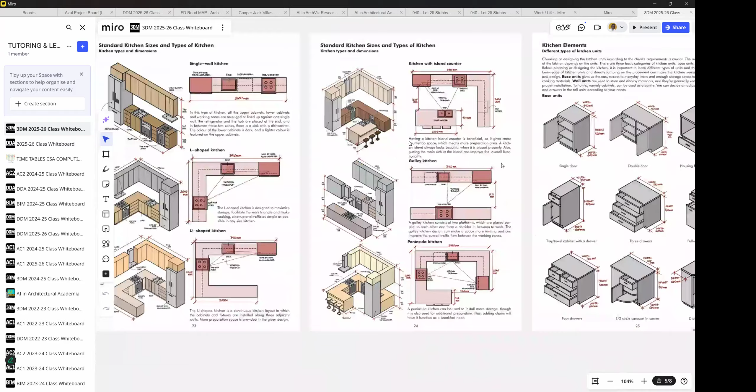So this is some great information about islands and kitchens and typical dimensions and typical sizes and typical layouts of kitchens, the names of different things, how you store stuff. It's really good information, guys. And I've put this together here so that you can use it. Hopefully, it can help you in your housing project.

And what we're gonna do is build a kitchen together, meaning you already have your kitchen, but I'm gonna be building one, and you basically follow what I do, but in your kitchen, right? I'll just do it in my demo kitchen, and then we're gonna render it together. So we're gonna learn a little bit about lighting and indirect lighting and rendering, but using a kitchen space. So you want to try to have your unit ready for that exercise, so that you can do it with your actual model.

But please go on the Miro board and use this information, guys. This is stuff I use all the time when I'm working on projects. I just took some snips of the different relevant pages. It focuses on kitchens, right? So you have no shortage of information. You guys are supposed to have a world-class kitchen in your units. Deal?

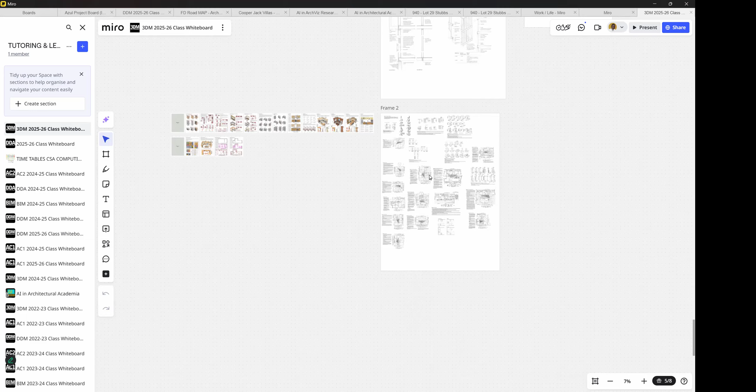Right? Somebody confirm. World-class kitchen for your design studio project. Yes, sir. All right. As usual, Sarto gave me a virtual handshake on behalf of the class. All right. That information is under tips and guides on our Miro board.

All right, guys. So that is going to be it for today. See, class wasn't that long. So I will follow up with you to find out where you are with Design Studio and kind of tailor what I do to that. Please finish your checkpoint 3, because we are definitely going to be moving to checkpoint 4.

Sorry, sir. I have a question. For my design for the cabin, I'm not really doing the stairs on the ground. I'm actually just connecting where the cabin is placed straightforward, so people can come directly into the cabin. But I'm not doing any stairs going down. Is that okay?

That's fine. You just need to have stairs that go from one level to the other. Yeah, I'm doing that. Right. As it relates to entering the building, that doesn't matter. Even if you don't have stairs, it's fine. Yeah. For the building, I was trying to do normal stairs, but the cabin is too small, so I'm gonna go for the spiral stairs just like you, because the other one couldn't fit. All right.

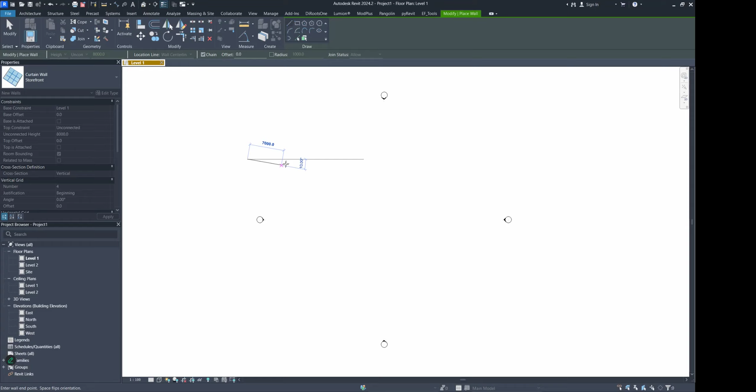So if I draw a storefront wall here, let me look at that in 3D. So that is the curtain wall there. The main thing you want to do is the glazing that is in it. So these are the glass that is in here. You want to get rid of the glass. Now, you can do that manually by literally clicking each glass and deleting it, but that will be kind of annoying because it's going to come back if you copy it or whatever, right?

Because how curtain walls work is you can tab into it. So I can select just one mullion, or I can select the actual glazing. And when I select any one of these, you get this pin here that says it is locked. So if I unlock it, then I'm able to delete it. But that's not how we're going to delete it. Usually we choose a type of curtain wall that is empty.

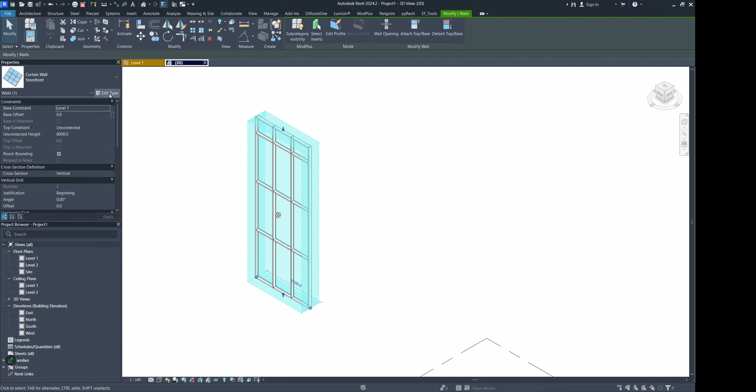So if I go to edit type here, and you're not seeing one that is empty there, then all you're going to do is modify this type called storefront, and where it says curtain panel, you're saying that you're not seeing empty here either.

This is where I chose empty. Yeah, I only saw curtain wall empty, but that was the one that still had the glass in it. I didn't see system panel. I didn't see system panel empty or anything like that. Oh, all right, cool. So because this represents the type of panel, you probably would have to load the panel. So okay, let's see.

All right, what I would do is, can you load an empty family? Let me see. If I go to my family folder, can I load? Let me see if I can load it. Well, it won't go if I go to components. Let me see if it will load. So if I go to components and I go to load family, you have this dialog box that comes up, and I go to where you have all the families. So if I go to the panel, it would be a type of panel.

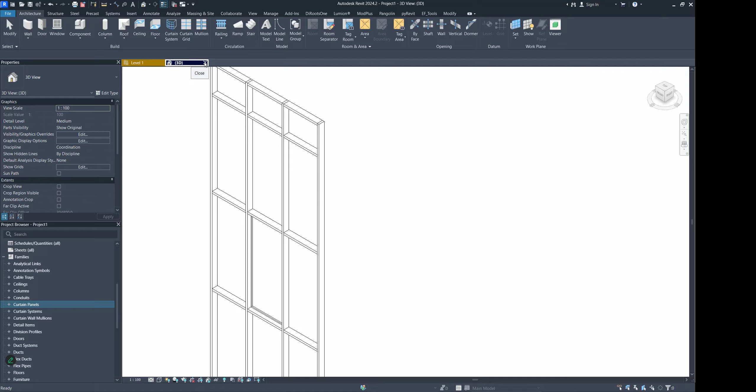It is because of the template. The template would load an empty panel, but if for any reason you choose a template that doesn't have that preloaded, you will need to manually load it into your project. So what does that look like? Let's say I go to my C drive here, and your Revit files, well, it's hidden. I can give you the path, but it's hidden. All of your Revit families are in C drive, then in a folder called program. Okay, how can I make you go there quicker? I don't want you to have to do a bunch of techie things. Oh, I have a good idea. So here's what you can do.

You can go to architecture, component, go to load family. The window will pop up, right? And you just hit the back button here. So in your case, you probably are in English, not English Imperial, but English. You would right click this and choose open. And that will open in Windows the location of your family folder. So in this case, this is where it is: C, program data, Revit. Revit will carry you there, and you just choose open, and this window will come up.